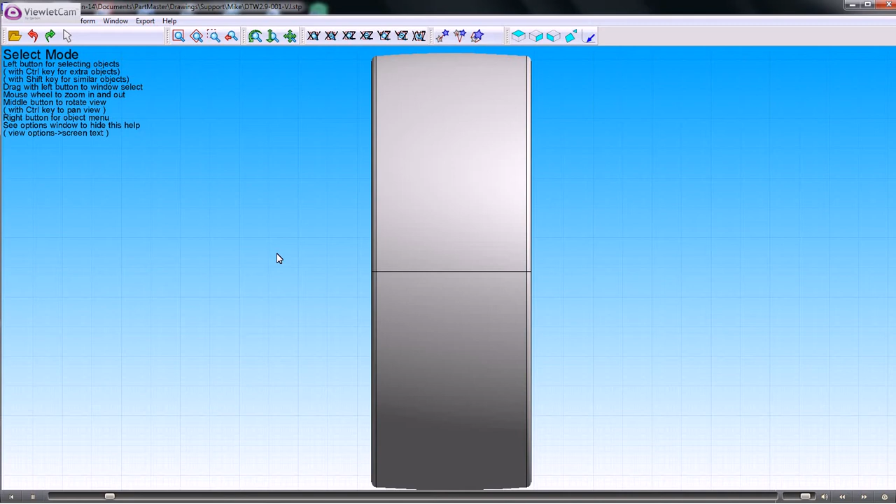So we'll open the file. This is the STP file. Using the center mouse wheel, you can scroll in and out to zoom. If you press down on the mouse wheel, you get a rotate feature. If you hold down the control key at the same time, you get pan.

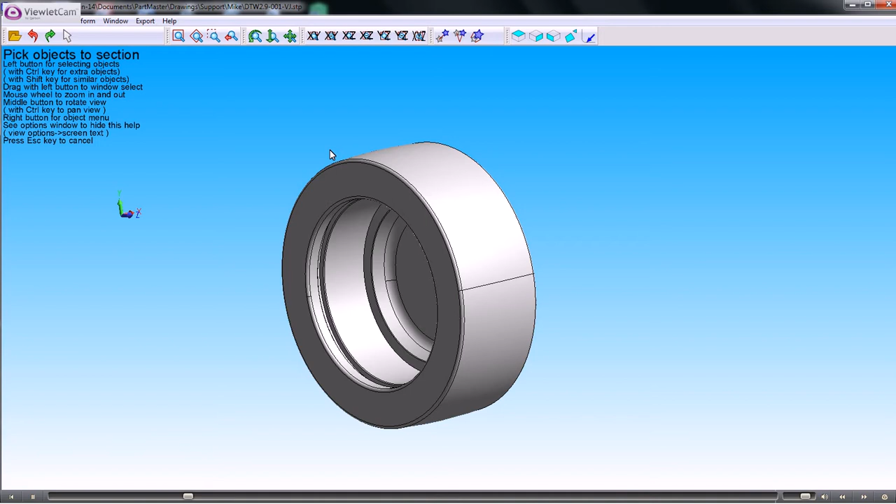With this one here, what we need to do is create a cross section. To do that, we come to the menu Transform Sectioning. The help at the top says indicate the objects to section, so we click and drag around the area. When we're finished, we press the enter key, and in this case we want to section it along the x-axis. That gives us half of the thing.

If we look in the XY plane, everything we do here is in the XY plane because this is for milling and turning. It's only when we get into the machining modules that things get transposed round to X and Z for turning.

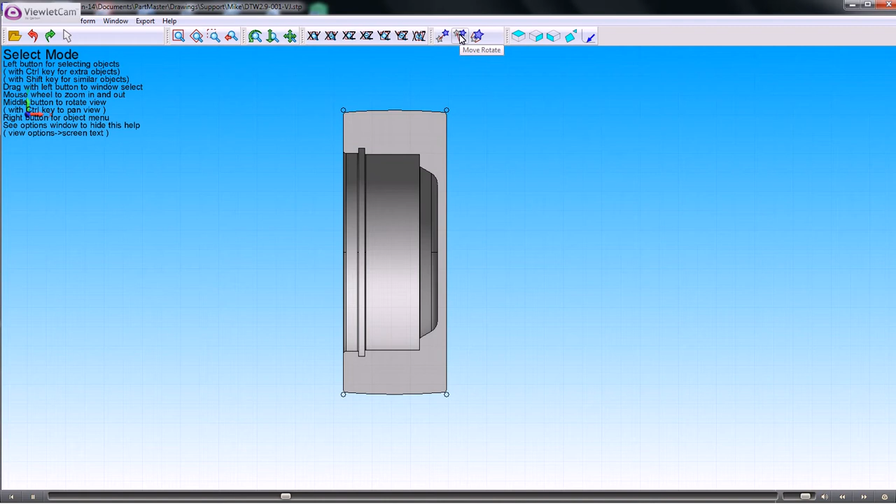So here we need to rotate the model round so that it's facing the right way, and we're going to do that in the XY plane by 180 degrees. If the model goes off the screen, we can simply drag it back. So in the XY plane, that's the model we want to use, and it's in the right orientation.

So we'll select the faces that we want to export. We do that using this icon here. Click on the face, then press enter, and we'll take this firstly into the CAD system because we need to set the datum and modify the geometry slightly.

So we're going into the CAD system. The datum point we can set up here as being X max, which is the maximum in this plane, and the Y can be the midpoint there. Don't forget we're working in X and Y within this module, and we're exporting it as inches.

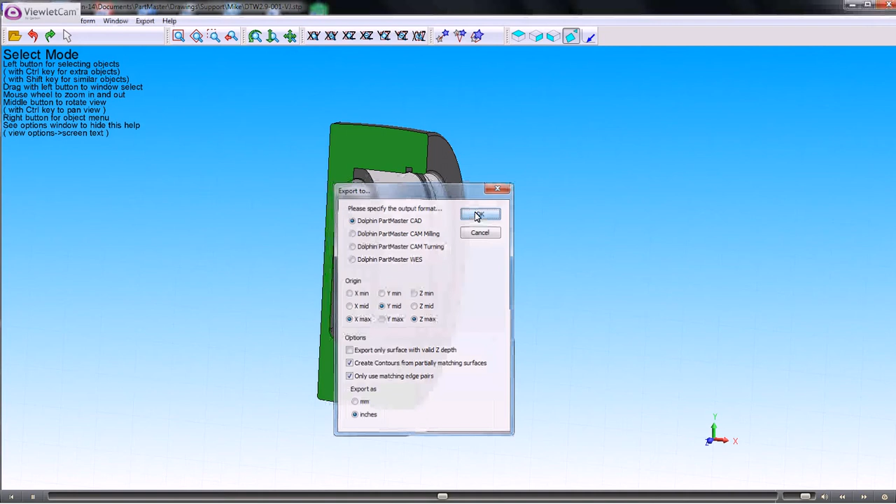So we click OK, and we give this drawing a name that we're creating, and that then calls up the CAD system. So that's now taken that section through into the CAD system.

There's a couple of things we need to do. We only need half of the model, so we need to split it at a line here, which I'm going to create. When we export things into the CAD system, they come through as a complete polyline shape, and we need to break that apart.

So to do that, we use curve extract, so point to somewhere on the shape, and it converts that into a single line and arc segments.

So now what I can do is simply draw a line through the datum point, a horizontal line there, and then use the intersect command to split that vertical line where it hits the horizontal one, and that vertical line where it hits this horizontal one.

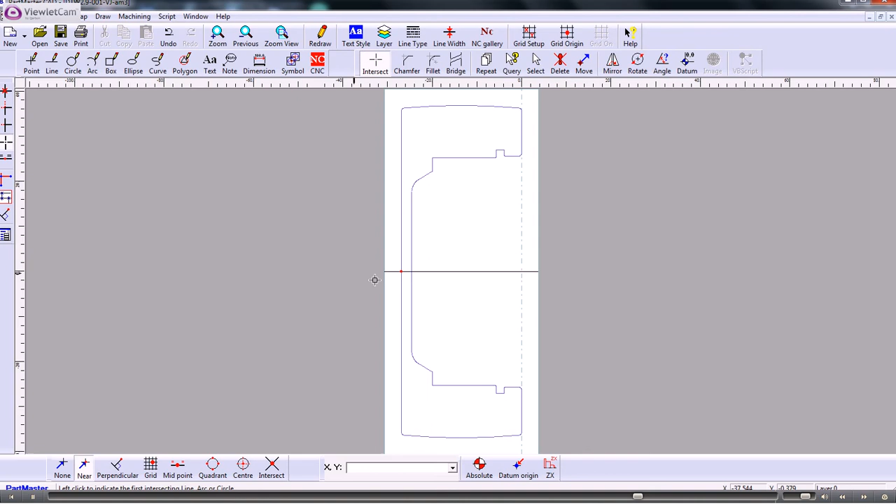So I've now got line segments, and to show you that, I can simply delete out these segments here. You can see how it breaks apart the model into line and arc segments.

Now we need to create what we call a profile. So to do that, we press the NC button. The datum point is where we set it, which is correct for turning, and we want to create a profile. A contour, which is this button here, is for milling.

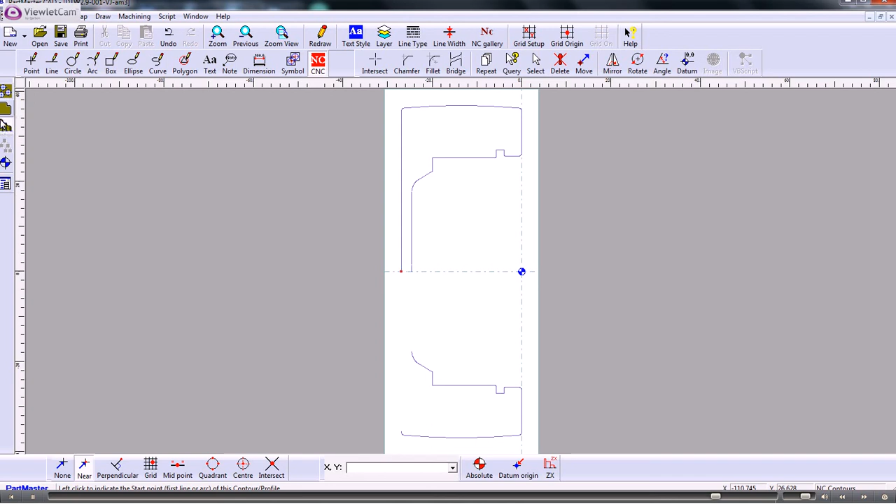Profile is for turning. So we're going to start off on the inside there, and we need to give it an endpoint, which is there. So that creates the profile, which we'll take into the CAM system in the next movie.